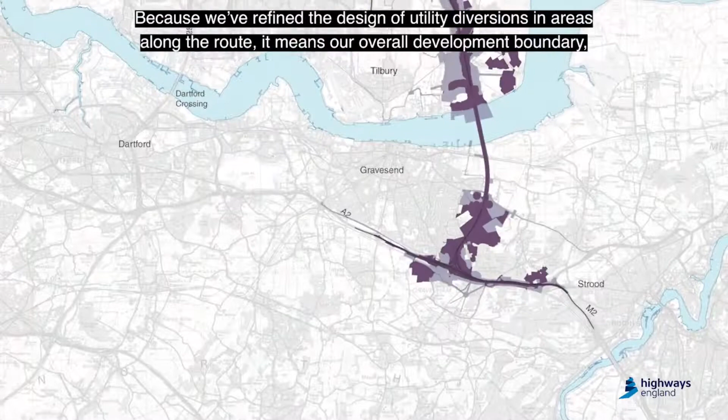Because we've refined the design of utility diversions in areas along the route, it means our overall development boundary, which is the land we need to construct the scheme, has reduced in size. This means that the number of properties inside the development boundary has nearly halved. You can see more details on this in our consultation documents online and in our virtual exhibition. If your property is in or near the development boundary, we will have written to you directly, but if you've got any questions, please do get in touch.

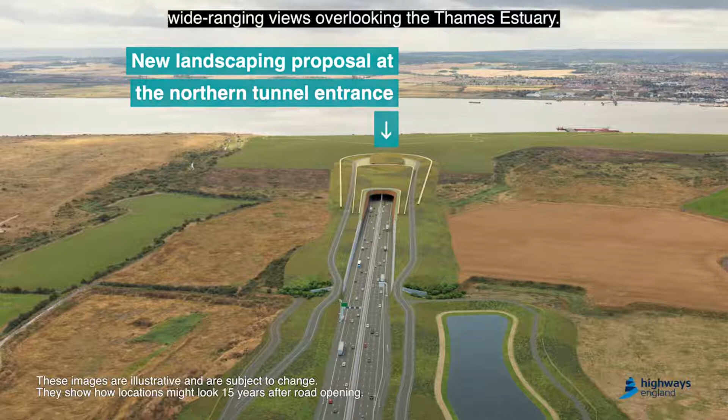Around the northern tunnel entrance near Tilbury, we're proposing to install utilities that would provide a power supply to the tunnel boring machine and northern tunnel entrance during and following construction. A new water supply for the tunnel boring machine and construction site area would also be required. This supply would come from the Linford borehole and a local water main. We're also proposing earthworks which would create a new landform design around the tunnel entrance and provide wide-ranging views overlooking the Thames estuary.

Following feedback from landowners and stakeholders, the maintenance access tracks around the northern tunnel entrance would be moved closer to the Lower Thames Crossing. This is to allow for a shorter culvert length, which would minimise the impact on the local ecology and allow wildlife to navigate through the culvert more easily. Two footpaths in the area would also be slightly realigned, and a new shared path along the south of Muckingford Road would also be progressed. This would allow for better connectivity between Chadwell St Mary and East Tilbury.

Near the A13 junction in Orsett, we're now proposing a new area of land for the relocation of the Travellers site. This would be adjacent to its current location with access off Gammonfields Way. As part of our woodland planting proposals, we've identified 2 separate areas off Baker Street that we would look to make accessible to the public.

Due to the essential realignment of a watercourse, we're proposing to remove a false cutting that we previously proposed in a section of the route between the A128 Brentwood Road and Hoford Road. So we're now developing other ways to help conceal the Lower Thames Crossing. Further details on this can be found in our consultation maps and documents online.

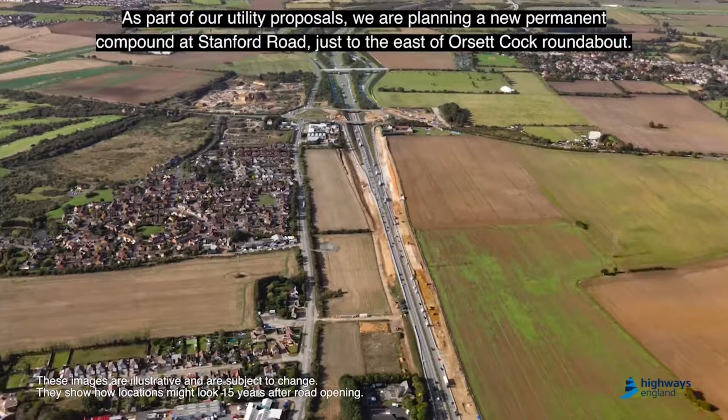As part of our utility proposals, we're planning a new permanent compound at Stanford Road, just to the east of Orsett Cock roundabout. This would be required for the operation and maintenance of a proposed gas pipeline, which would supply the local community. In the vicinity of the Mardyke, we're proposing permanent access from Green Lane for the National Grid. This is so it could maintain overhead electricity transmission cables during the diversion works and afterwards for the operation of the network.

North of Thames Chase Forest Centre, we're proposing a new maintenance access track and a multi-utilities diversion. We've located these within the same area to limit the reduction in woodland compensation that would be required to accommodate these changes. Around junction 29 of the M25 within the vicinity of the B186 North Road, some above and below ground multi-utilities would need to be diverted to facilitate the proposed route. Full details about these utilities proposals can be found in consultation maps and documents online.

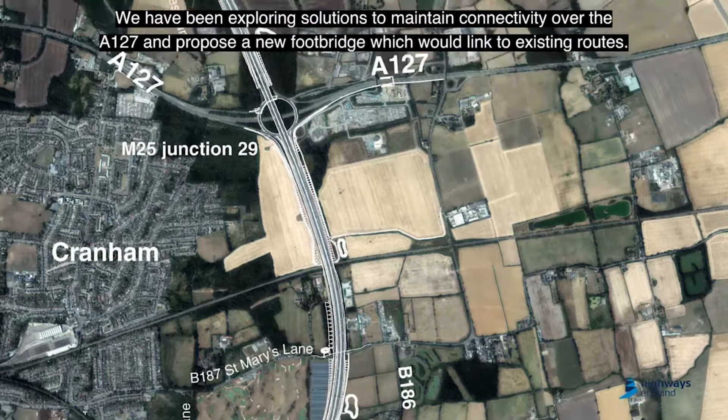We've been exploring solutions to maintain connectivity over the A127 and propose a new footbridge which would link the existing routes. We've carried out detailed noise assessments and have identified locations along the route where noise barriers could be used to reduce the sound of traffic for local communities. Further details on these proposed locations of noise barriers can be found in our consultation documents and maps online and in our virtual exhibition.

These are just some of the design refinements we're consulting on.

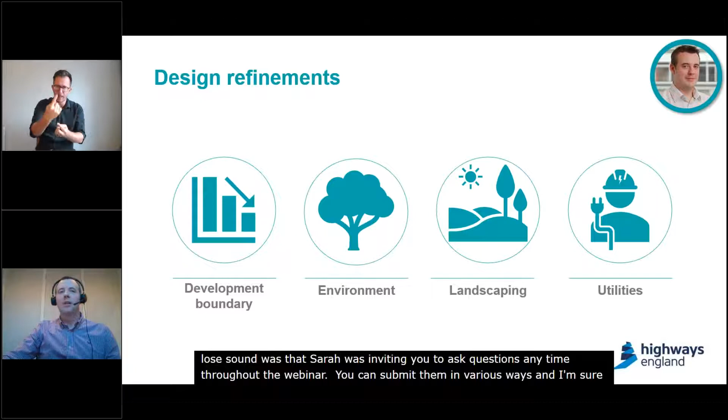Okay, so to complement the video you just watched, we'll now run through the refinements in a little more depth. We'll start off by covering some key themes regarding the development boundary, the environmental impacts, landscaping and utilities. And then we'll dive into the refinements on a junction by junction basis. So we'll start by discussing the development boundary.

Okay, so we have the development boundary map on the screen right now, and we've been able to reduce the amount of land required by around 12.5%, and this is by refining the design of the utility diversions in some areas along the route. Within this revised development boundary, there is now some additional land that will be required permanently, whereas other areas like construction sites will only be needed temporarily. Any land that's required temporarily will be reinstated and returned to its owner once construction is complete.

If your property is affected by the scheme, you should have been written to already. And if you've received a letter, please feel free to give us a call to discuss it on 0300 123 5000. That's 0300 123 5000.

Okay, on to environmental impacts now. So following feedback from our supplementary consultation, we've been able to refine the land required for utility diversions, as I mentioned. In doing so, we've been able to reduce the impacts to various wooded areas.

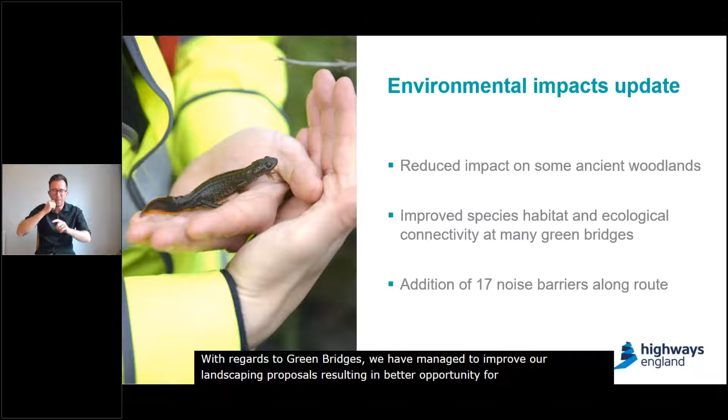With regards to green bridges, we've managed to improve our landscaping proposals, resulting in better opportunity for ecological connectivity. This means that we have now consolidated the green space on the bridges, which feature vegetation, like shrubs, trees, grassland, hedgerows, etc. And this makes it more attractive for wildlife to use as a crossing point over the given road.

To help mitigate noise, we've introduced some noise barriers in areas where higher noise levels and disturbance is anticipated. These barriers vary in length and height along the route. To learn more about specific noise barriers, please refer to the Design Refinement Consultation Guidebook, which is available on the Lower Thames Crossing website.

And now on to landscaping. As we've progressed the design of Lower Thames Crossing, we've also developed more detailed landscaping proposals to mitigate the visual impacts of the project's above ground infrastructure. Since supplementary consultation, we've added more detail on the specific type of ecological mitigation proposed across the route, such as grassland, woodlands, and further refinements around watercourses. And we've also updated various areas of the landform and provided some new viewpoints.

Turning now to our utility proposals, we've continued to refine our proposals for the utility diversions across the route, and we're now proposing some further changes to the position presented at supplementary consultation. One of the more notable updates includes the need for various small substations along the route. These would be approximately 3 meters by 3 meters and around 2.5 meters in height. The number and location of these substations will be confirmed following further design work and continued engagement with our stakeholders.

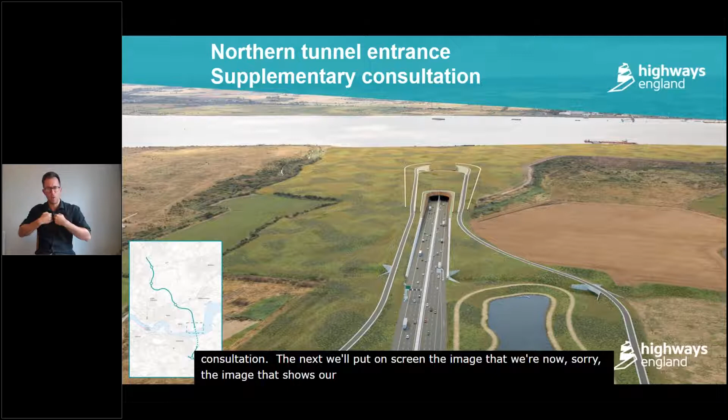Okay, so now we'll dive into the refinements north of the Thames, beginning with the Tilbury area and the area around the Northern Tunnel entrance. So the image on screen right now is the Northern Tunnel entrance near Tilbury as presented at supplementary consultation. And next we'll put on screen the image that shows our proposals at this design refinement consultation so that you can see the difference. We're just going to switch between the two.

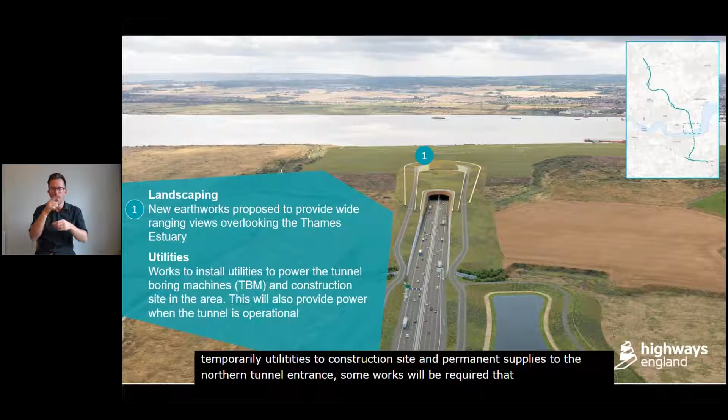With regards to utility proposals in this area, to supply temporary utilities to the construction site and permanent supplies to the Northern Tunnel entrance, some works will be required that sit approximately 1.5 kilometres outside of the development boundary that was presented at supplementary consultation.

Staying in the same area, we're now showing another angle of the Northern Tunnel entrance as presented at supplementary consultation. And again, we'll switch between this image and the one showing our proposals for the design refinement consultation so you can see the difference. Thank you. Next slide, please.

Moving now to noise barriers. These are shown as points 1A through to 1C on the image. The Tilbury area will feature 4 noise barriers as part of our noise mitigation efforts. If you'd like to learn specifics about these barriers, please see the Guide to Design Refinement Consultation, which is on our exhibition website.

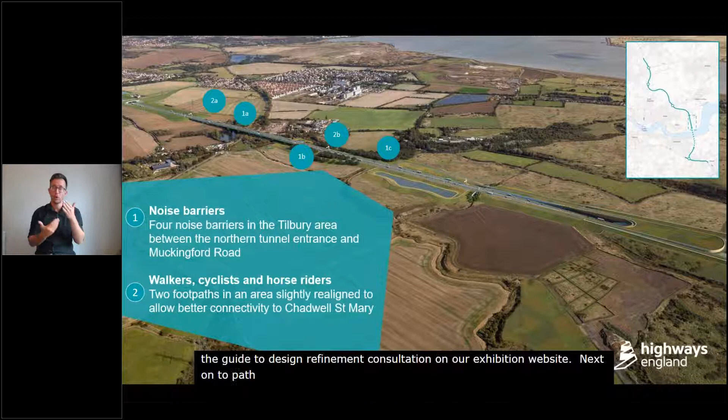Next, on to paths for walkers, cyclists and horse riders. These are shown as numbers 2A and 2B on the image. The path closest to us is footpath 200, and the path furthest east, closest to East Tilbury, is footpath 61. Footpath 61 has been slightly amended to use more of the existing footpath and to follow the existing field boundary. This refinement reduces the amount of land that will be required permanently in this area.

Footpath 200 will be diverted around the edge of the field rather than pass through it, as was proposed at supplementary consultation, and this will connect with the existing footpath at either end. This proposal is closer to the original alignment.

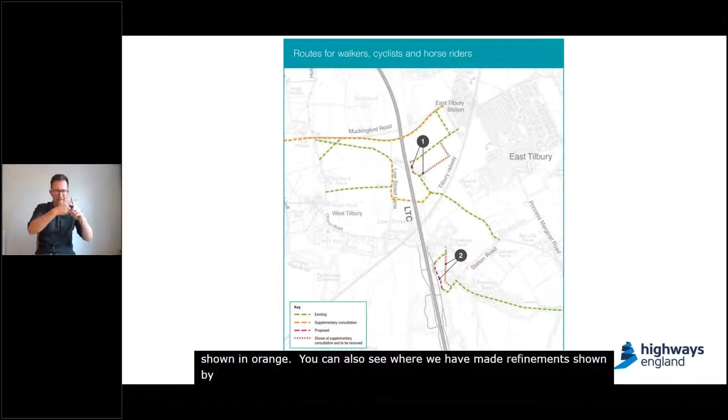So taking a closer look at the paths in this area, we've marked the refinements to footpaths 61 and 200 in red on the map on screen now. Existing paths are shown in green, and what was previously presented at supplementary consultation is shown in orange. You can also see where we've made refinements shown by the dotted X's. These refinements reduce the amount of land that will be required permanently in this area.

Moving on to utilities in the Tilbury area, as the tunnel boring machine would need a water supply to assist with the excavation process, we're proposing two routes to gain access to water using the Linford borehole as well as a local water main located near Fort Road and Gun Hill. Details of where we propose to route the water mains can be found in the Guide to Design Refinement consultation.

In addition to the works described previously, we're also planning on the addition of two substations in the areas surrounding the northern tunnel entrance, and these again are described in more detail in the guide.

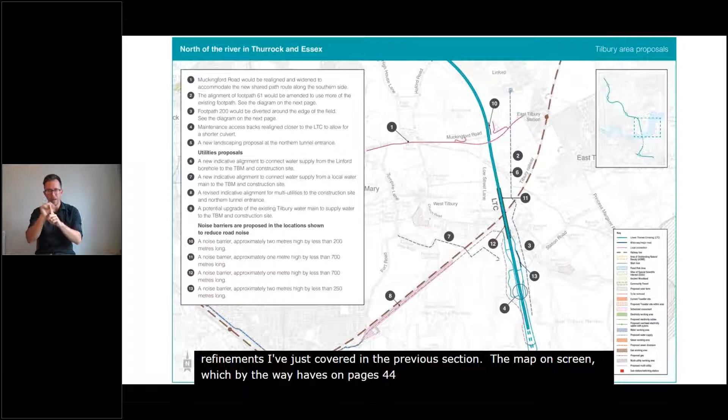So just to recap on the refinements I've just covered in the previous section, the map on screen, which by the way is also on pages 44 to 45 of the Design Refinement Consultation Guide. Starting with number 5 on the map, you can see where we propose the lookout over the River Thames estuary that we discussed earlier.

Moving on to utility diversions, points 6 through to 9 show some of the utility diversions we're proposing. Point 6 in particular shows the new alignment to connect the water supply from Linford borehole to the construction site and the tunnel boring machine. Finally, points 10 through to 13 show the proposed locations of noise barriers in this area.

Okay, so now we'll dive into the refinements around the Orsett Cock roundabout near the A13 junction.

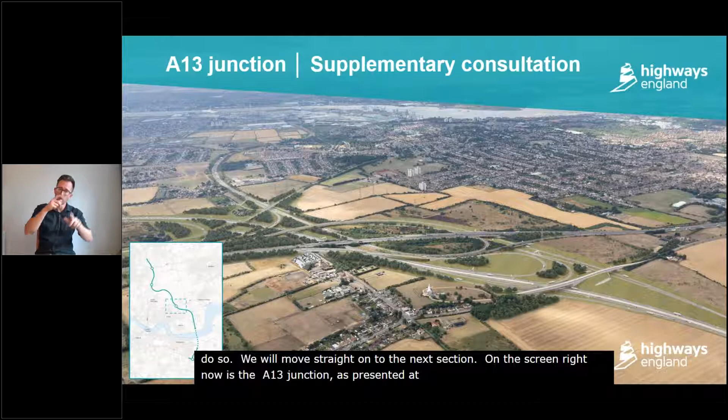So on the screen right now is the A13 junction as presented at supplementary consultation, and we'll switch between this image and the one showing our proposals for this design refinement consultation so you can see the difference. Thank you. So now going into the detail.

Firstly, with regards to the traveller's site in this area, following further design work and feedback from our supplementary consultation, we're now proposing a new site adjacent to its current location with access off Gammonfields Way. The traveller's site would remain approximately 1.5 hectares in area, which is the same as it is now, with an additional 1.5 hectares set aside for appropriate access and landscaping. This is shown as number 1 on the image on screen.

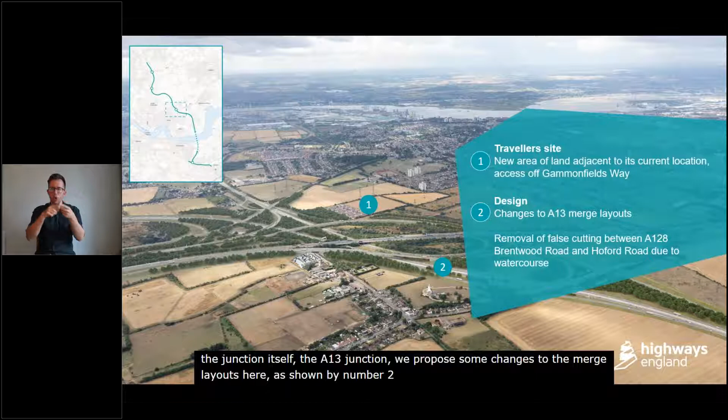Moving to design refinements at the junction itself, the A13 junction, we propose some changes to the merge layouts here, as shown by number 2 on the image on screen. So where the A13 westbound and the A1089 northbound slip join the LTC northbound, our modelling has shown that more heavy goods vehicles would join Lower Thames Crossing northbound from the A1089, so a different merge layout will be required. Also, where the slip road from the Orsett Cock roundabout joins the existing A13 westbound, there's a slight increase in forecast traffic flows, meaning a different merge layout will be needed there as well.

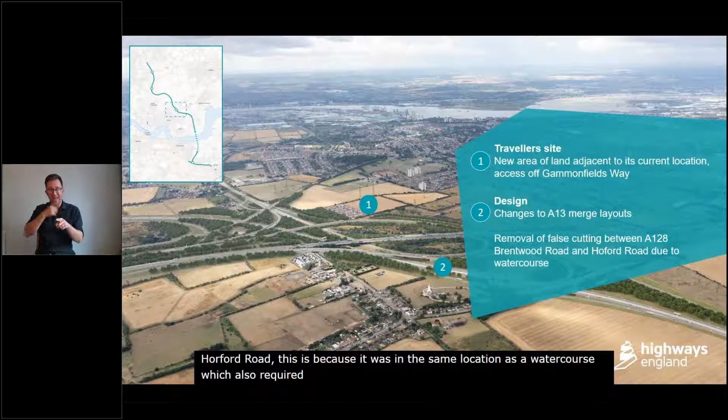Next, we've also proposed the removal of a false cutting, or a sloped embankment, some may call it, between the A128 Brentwood Road and Hoford Road. And this is because it was in the same location as a watercourse, which also required realigning to avoid Lower Thames Crossing. So removing this sloped embankment will mean losing some visual and noise screening, so fencing and additional planting are proposed to help conceal Lower Thames Crossing.

Onto utilities, we currently propose 7 small substations in the vicinity of the A13 junction. These would be approximately 3 metres by 3 metres in size, with a total area of 5 metres by 4 metres. If you'd like to know the specific locations of these substations, you can find more details in the Guide to Design Refinement consultation.

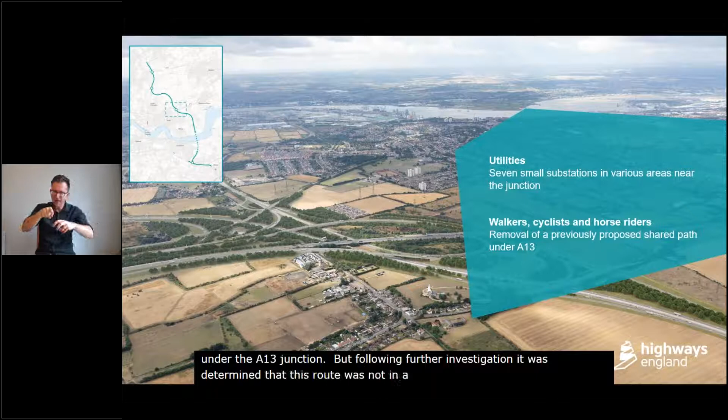For walkers, cyclists and horse riders, at supplementary consultation, we were exploring the feasibility of a new footpath connection under the A13 junction. But following further investigation, it was determined that this route was not in a desirable location due to its close proximity to the high-speed traffic. As a result, the open space to the north of the A13 that was proposed in supplementary consultation is no longer included in our plans, as it would not be accessible.

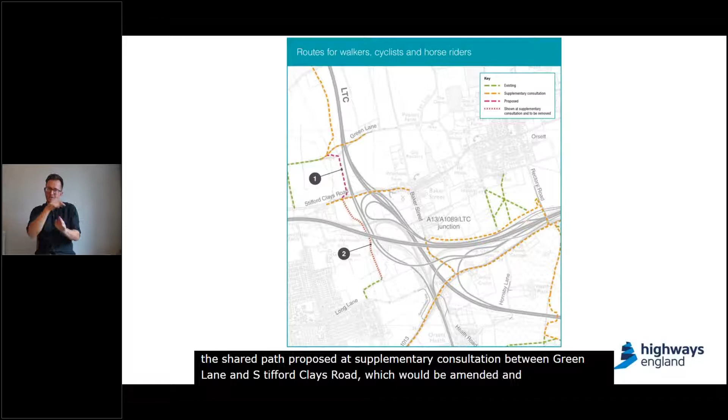Just taking a closer look at paths in this area, we've marked the newest proposed refinements in purple, with existing paths in green and what was shown at supplementary consultation in orange. You can also see where we've made refinements shown by the dotted X's. Number 1 on this plan shows the shared path proposed at supplementary consultation between Green Lane and Stifford Clays Road, which will be amended so it's slightly closer to Lower Thames Crossing to avoid impacting farmland. And number 2 shows what was discussed on the previous slide, where we're no longer progressing with a shared path under the A13 due to its close proximity to the A13 and slip roads.

So on the screen right now is the Orsett Cock junction near the A13 as we presented it at supplementary consultation. And again, we're going to switch between images, bringing you up to date with our design refinement consultation proposals so you can see the difference.

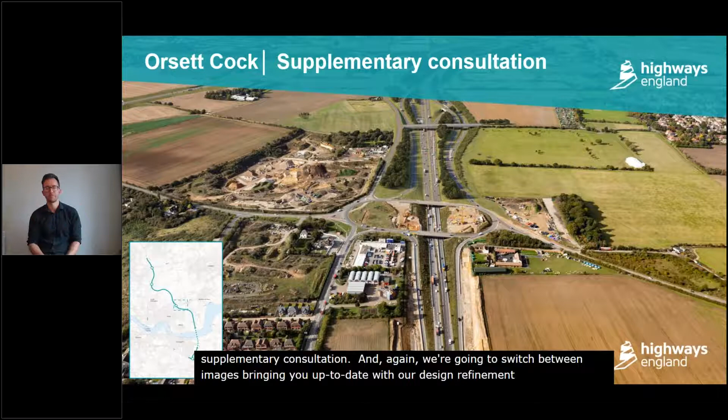So going on to the detail in this area, beginning with noise barriers, these are denoted by 1A and 1B on this slide. There are 2 noise barriers proposed west of Orsett Cock Junction.

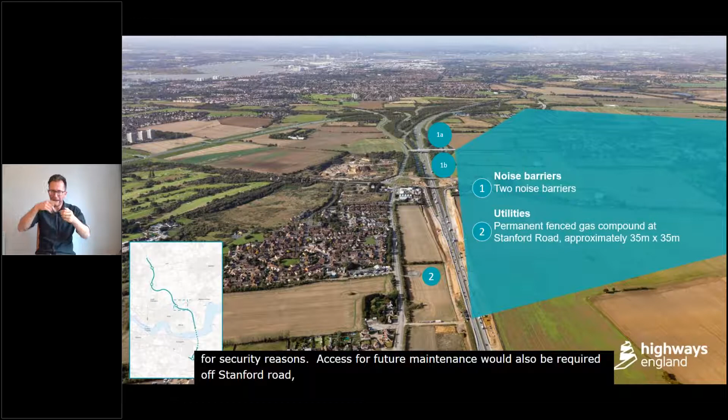With regards to utilities, as denoted by number 2 on the image on screen, a permanent compound east of Orsett Cock roundabout along Stanford Road is planned for the operation and maintenance of a proposed gas pipeline in this area. The facility, including equipment, will be located within an area approximately 35 metres by 35 metres, which would include some fencing for security reasons. Access for future maintenance would also be required off Stanford Road. Some land outside the development boundary shown at supplementary consultation would also be required for these works. This means that the development boundary has been extended in this area.

So just to recap on that section, we've just covered the area which is actually also shown on pages 56 to 57 and 58 to 59 of the Guide to Design Refinement Consultation, for those of you who've got that. Starting with number 1, the map on screen, this is where we propose changes to the merge layouts owing to new and improved modelling data.

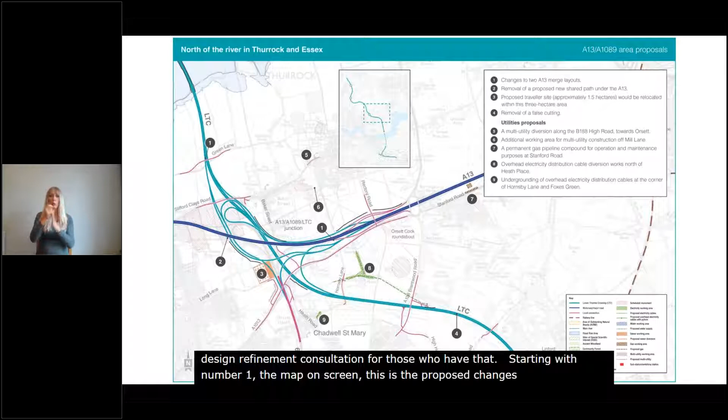Number 2 shows where we are no longer progressing with a shared path under the A13. Number 3 shows where we've proposed the relocation of the Travellers site adjacent to its current location. Number 4 shows where we propose the removal of the false cutting or sloped embankment.

Next, number 10 shows the location of wooded areas off Baker Street that we're proposing to make accessible to the public. And finally, numbers 11 through to 18 show the location of noise barriers. Okay, so now we'll cover the refinements in the Mardyke and M25 LTC junction areas.

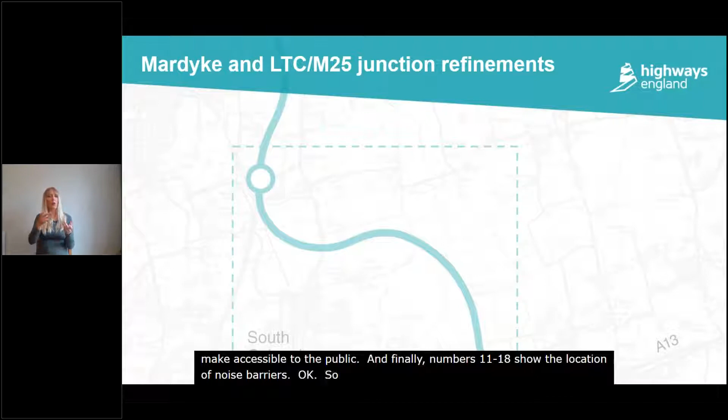For utilities in this area, National Grid need access to Green Lane for the maintenance of their overhead power lines, and this access will be required during the diversion works for the lines and afterwards for the operation of the network. These works would require the use of some land outside of the development boundary shown at supplementary consultation. By increasing the land for the works required at this location, we have more space and that means that we can avoid impacting existing vegetation.

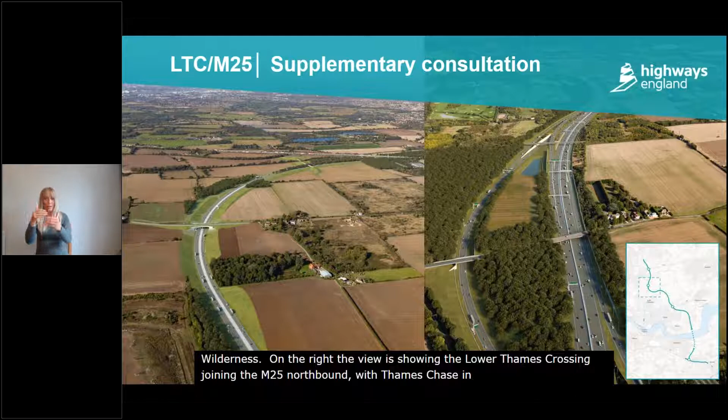On the screen right now is the LTC M25 junction as seen from 2 perspectives as presented at supplementary consultation. So starting with the image on the left, we're looking at the Lower Thames Crossing from the east of North Road Bridge and the area around the wilderness. On the right, the view is showing the Lower Thames Crossing joining the M25 northbound with Thames Chase in the foreground. So we'll just switch now between these images and the ones showing our proposals for the design refinement consultation so you can see the difference. Thank you. So now onto the detail in this area.

So firstly, we're proposing a noise barrier in the area of the wilderness. This is denoted by the number 1 on the image. Details of those noise barriers, again, are available in the guide, design refinement consultation, or on our exhibition website. With regards to planting, staying in this area, we're proposing to divert a watercourse within the area of the wilderness, and to accommodate this, we're proposing a reduction in the woodland planting in this area. This is shown as number 2 on the image.

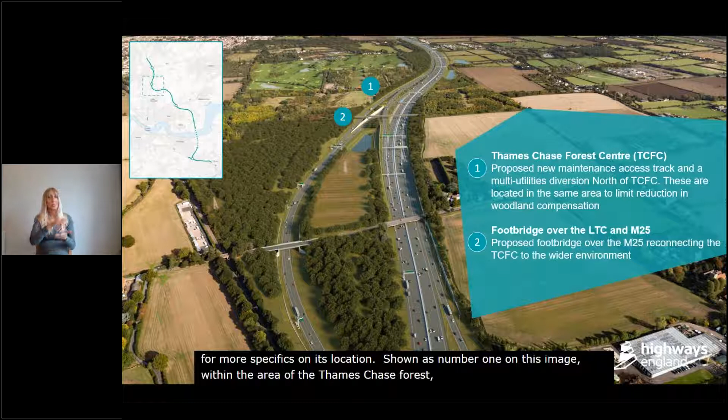And finally, utilities. We're currently proposing 1 small substation in this area. Again, please refer to the guide for more specifics on its location. So shown as number 1 on this image, within the area of the Thames Chase Forest, we're proposing a new maintenance access track which will be shared with multi-utility diversion corridor north of Thames Chase Forest Centre. These are located in the same area to minimise the reduction in woodland compensation.

And shown as number 2 on this image, we also propose to acquire replacement land to the north and south of Thames Chase Forest Centre. This would be landscaped to match the current site and would connect to existing paths. The replacement land would be designed to complement the existing forest. As part of the mitigation, we propose a footbridge over the Lower Thames Crossing and M25 to improve the connection between the western and eastern sections of the Thames Chase Community Forest.

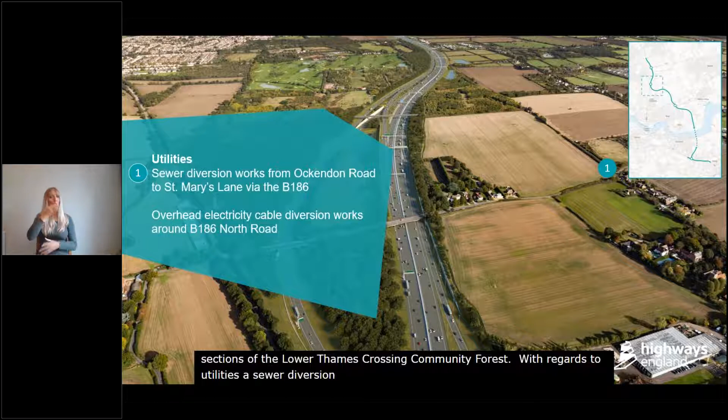With regards to utilities, a sewer diversion may be required from Ockendon Road to St Mary's Lane via the B186. This is due to the proximity of the existing sewer pipes to the proposed Lower Thames Crossing route and the proposed Ockendon Bridge construction works in this area. That's number 1 on the image on screen.

There's also some above and below ground utilities within the vicinity of the B186 North Road, which would need to be diverted to facilitate the proposed Lower Thames Crossing route. Some of the overhead power lines in this area may also need to be placed underground to avoid the proposed Lower Thames Crossing route.

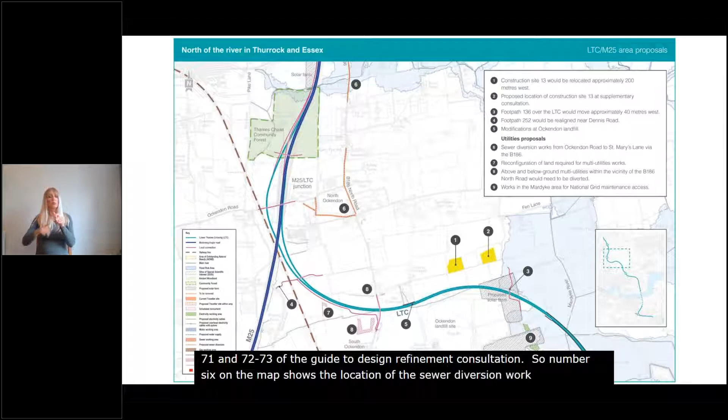So to recap on that last section we've just covered, the map on screen right now is also on pages 70 to 71 and 72 to 73 of the Guide to Design Refinement Consultation. So number 6 on the map shows the location of the sewer diversion works. Number 8 shows where utility works would take place in the vicinity of the B186 North Road.

Number 10 on the map points out Thames Chase Community Forest, where we're proposing to reduce the woodland planting to accommodate a new maintenance access track and for utilities. Number 11 shows where reduced woodland planting would take place at the Wilderness as a result of a watercourse diversion. And finally, points 12 through to 14 show the location of noise barriers from the Mardyke area to the Lower Thames Crossing M25 junction.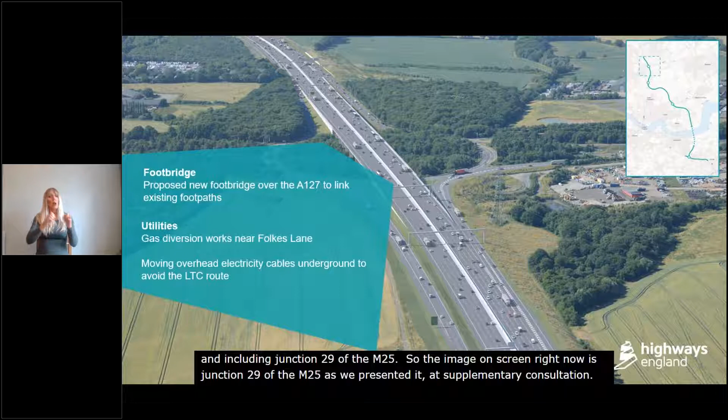Starting with a new footbridge, at supplementary consultation we showed an existing path next to the south side of the A127 that was impacted due to the addition of segregated left turn lanes on and off Lower Thames Crossing. These lanes meant that the existing crossing points to the south of the junction would no longer be feasible. So we now propose a footbridge over the A127 to link the existing routes. Unfortunately, the footbridge is just out of frame on this image, but I'll point it out on the map on the next slide.

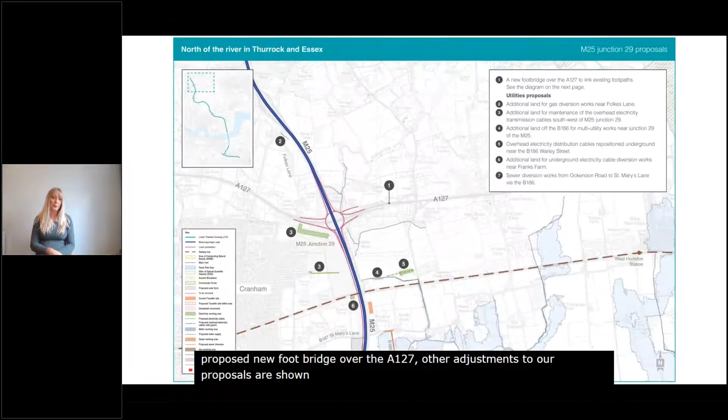So as just mentioned, shown as number 1 on the map on screen, this indicates the proposed new footbridge over the A127. Other adjustments to our proposals are shown in the purple colour. So just to recap on that section, which is also on pages 82 and 83 of the Guide to Design Refinement Consultation.

Starting with number 1, that shows the proposed location of the footbridge over the A127, which will link the existing facilities in this area. Moving on to number 2, this is where the Folkes Lane gas diversion would take place, for which we require additional land compared to that presented at supplementary consultation. And finally, I'm just going to point out number 5 on the map, which shows where we're proposing to bury some electricity distribution cables, which are near the B186 Warley Street.

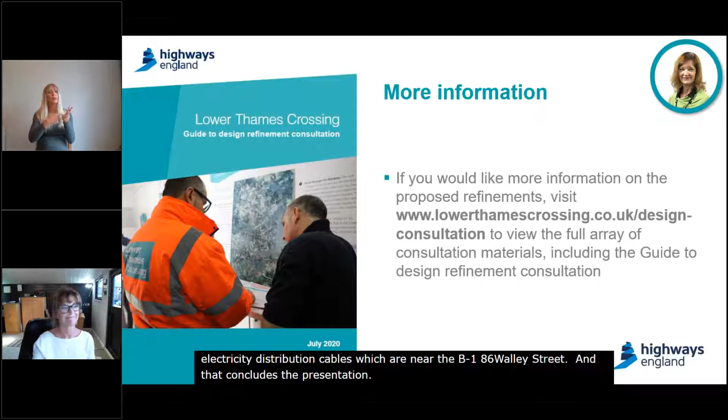And that concludes the presentation, and I'll hand back to Sarah. Thanks for that run through, Steve. Thank you for the run through of those proposed refinements along the route. I think that was really laid out really clearly.

As we mentioned at the start of our webinar, our goal today was to provide you with an overview of some of the more notable refinements made to our proposal since our supplementary consultation.

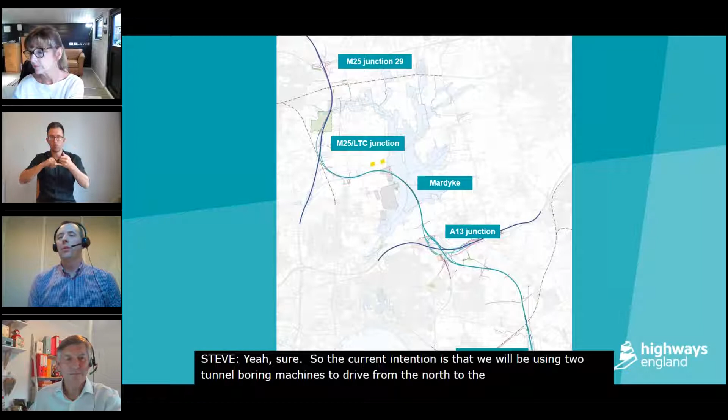Steve, I think this is a question for you. It's a question about on which side of the river will the tunnels be bored from? Steve, would you mind picking that up? Yep, sure. So the current intention is that we'll be using 2 tunnel boring machines to drive from the north to the south. It's possible that one will be used and then brought back to the north side, but the intention is to drive from north to south for both tunnels.

So there'll be a large compound around the northern tunnel entrance where the tunnelling activities and associated support functions will sit. There's quite a lot of information about this within the statutory and supplementary consultation guide. So if you wanted to know more about how the tunnel is going to be built, you can look there, which is on the Highways England website under Lower Thames Crossing. Thank you for that, Steve. I know that's a question that's come up before and one that intrigues people.

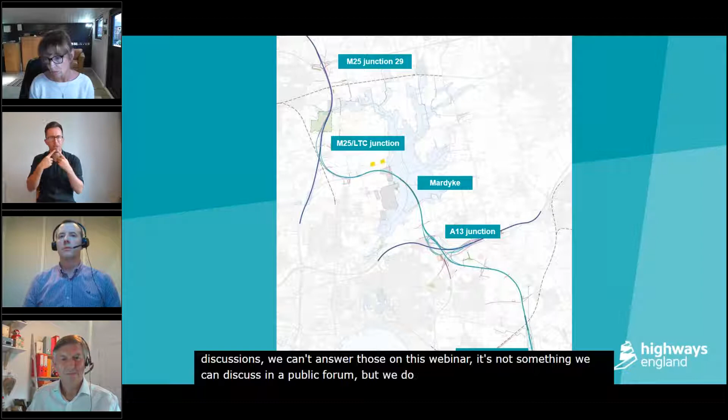We've had a few questions come in about individual land and property matters. As we said earlier, to protect the confidentiality of everybody who's involved in land and property discussions, we can't answer those on this webinar. It's not something we can discuss in a public forum, but we do have a dedicated land and property team. And I would encourage you to give them a call using our telephone surgery service. It's quite simple to place a call, and we will get one of our specialist team from the land and property team to call you back.

So you can either email on info@lowerthamescrossing.co.uk or give us a call on that number that we've mentioned a couple of times, 0300 123 5000. So that's just a reminder for anybody who's asked land and property questions. It won't be something that we're able to handle this evening.

Okay, another question's come in. This is about the A13 junction. Gary, this might be one for you. Will the junction with the A13 still make, and I'm so sorry, it's just disappeared off my screen. I will get back to it. Will the junction with the A13 still make the 3 lanes back to 2? Can this not be improved, seeing as we've been through all the grief making the 2 lanes up to 3 at great cost? That's a question there about the A13. Gary, can you pick that up?

Yes, of course. Good evening, everybody. With the A13, the section that's been widened is from Orsett Cock up to Manor Way, which is currently being done under the Thurrock scheme. So that's being widened out from 2 lanes to 3 lanes, and it's mainly to feed the London Gateway port down through the A13. A section of the A13 junction we will be making is from 3 lanes back down to 2, but it's within the junction. It's normal practice to do that.

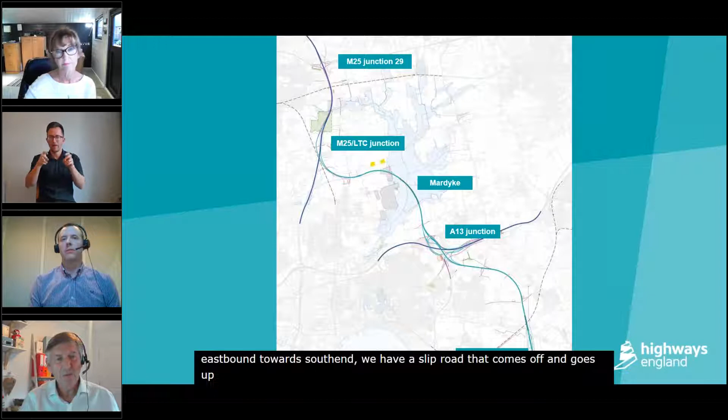The sections that we're going to be doing are in between the A1089 and the Orsett Cock roundabout. If you're coming out of London, so going eastbound towards Southend, we have a slip road that comes off that goes up to Orsett Cock roundabout. So what we get is what we call a lane drop. And from that point onwards, there's a section where the Lower Thames Crossing north and southbound link road will join onto the A13. And we have to have a lane gain. The merge type has to be a lane gain, otherwise it's a departure.

So in fact, we'd have to go to 4 lanes beyond that if we weren't. But the traffic on that section, it's about 400 meters long, that's all, would be reduced to two lanes, and vice versa. Going back into London again, where we've got the slip road going off to LTC, so a lot of traffic coming off the A13, and the traffic from Orsett Cock rejoining the A13, there's about a 600-metre length that would go down to the 2 lanes. But again, if you look at any highway junction, you often get a lane drop and a lane gain.

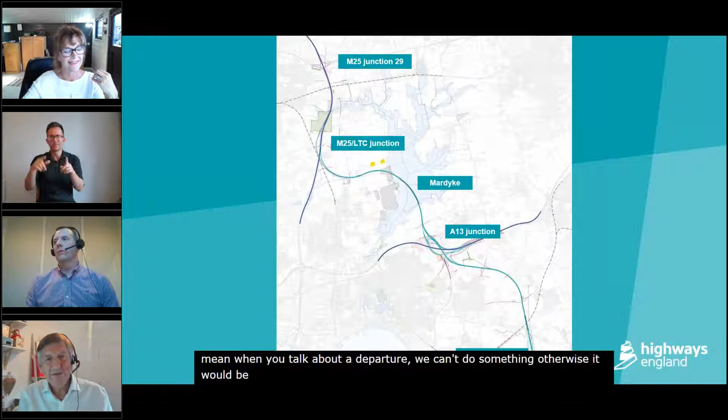Gary, before you finish that question, can you just briefly explain what you mean when you talk about a departure? We can't do something, otherwise it would be a departure. What does that mean? Right, so a departure from the standard isn't necessarily a bad thing, actually. It's really just pushing the standards. What it means is that if you don't comply with the standards precisely, you have to then go and speak to the safety division with Highways England and get agreement with them to go ahead with that particular design.

But also, even if it's an over-provision, you have to go for departure. So sometimes we look at things and say, right, well, we need to do something a bit more here. But again, because it's the public purse and everything else, you have to actually make sure that it complies, and you have to do a risk assessment. So it's quite a long process to make sure that you don't do something that's not within the overall premise of the standard.

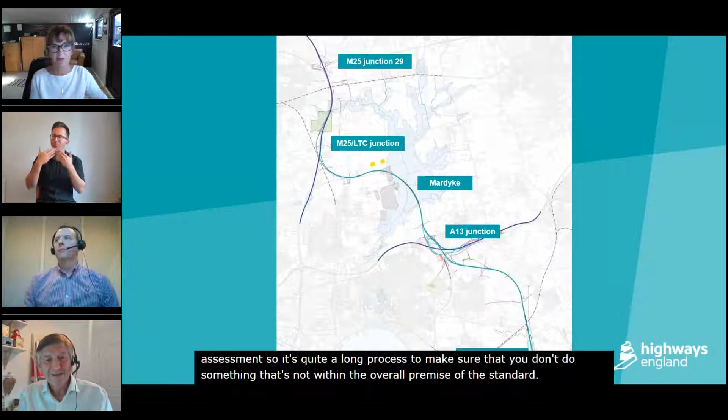Thank you, Gary. I think it's just useful to explain. Sometimes we all use language that we just expect everybody to understand. Yeah, thank you.

Next question that's come in. The removal of a false cutting between Brentwood Road and Hoford Road has raised alarms in the Linford community, who are already very concerned about the level of noise, vibration and air quality. Steve, perhaps you can pick this up. What mitigation is in place in construction and final road design?

Okay, yes. So just a quick reminder why we're taking the false cutting, the false embankment, away. Unfortunately it was coincident with the location of a watercourse diversion. So we have an existing watercourse that we need to divert because it clashes with our proposed alignment at Lower Thames Crossing, and we couldn't have that false cutting embankment in the same location as the diverted watercourse. So I'm afraid the watercourse won out in that regard.

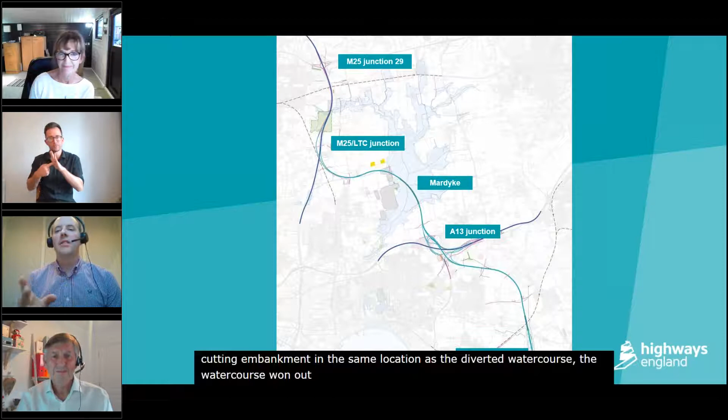But the false cutting in that area was really to be used as a visual screen to screen Lower Thames Crossing from the golf course side, looking southwest. And so we're planning to mitigate the loss of that visual screen from the embankment by putting some planting there instead. So it wasn't solely there for noise mitigation purposes. There is a property that's very close to Brentwood Road, and that will benefit from a specific noise barrier.

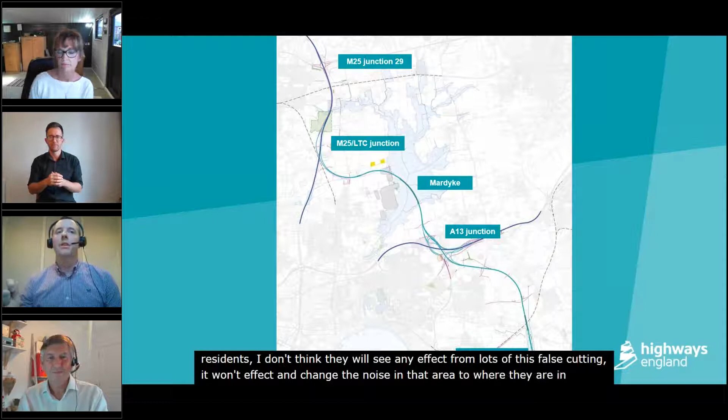In terms of Linford community residents, I don't think they'll see any effect from the loss of this false cutting. It won't affect and change the noise in that area to where they are in the east. In terms of construction effects, this change will not change the construction impacts.

What we're trying to do with those will be set out in detail in a document called the Code of Construction Practice, which has to be submitted as part of our development consent order, and that will set out very detailed measures and requirements that the contractor must meet in order to minimize noise, vibration and air quality issues. So I hope that will be available soon for public viewing, and I hope that will reassure the Linford community that we're doing as much as we possibly can to mitigate those effects. Thanks very much, Steve. Yes, that'll be available when we submit the development consent order application.

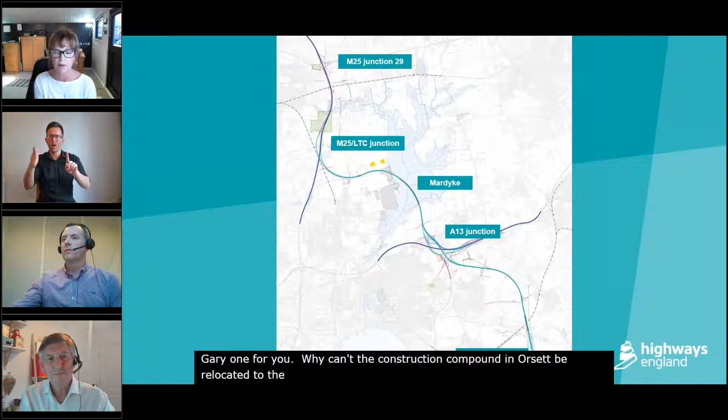Thank you. Another question now. Gary, one for you. Why can't the construction compound in Orsett be relocated to the west side of the LTC, moving it away from the Baker Street residential area? A couple of people actually asked that question.

Right, the construction of the A13 junction is very complicated. And I think we've got a number of construction compounds that will be needed to build LTC. The position is based on our construction requirements and providing access for our workers and material deliveries. The site near Baker Street is a small secondary site, which will typically include welfare facilities, materials and equipment. The location also provides access for the eastern side of LTC at that point.

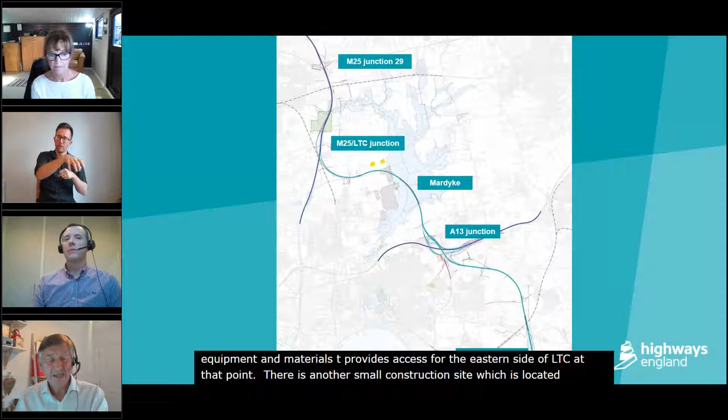There is another small construction site which is located on the west side of LTC to provide access from that side. And I just think the team looking at the actual construction strategy have found it's really the only location where we could sensibly fit in a compound. We have looked at the way the junction is being constructed, and that's been a site that's been allocated for that particular construction compound.

Thanks very much, Gary. On a completely different subject now, the next question that's come in. The question is, can you confirm that motorcycles will be toll-free in line with your statement that charging will be the same as the Dartford crossing? Steve, the question about charging then, with particular reference to motorcycles, can you pick that up?

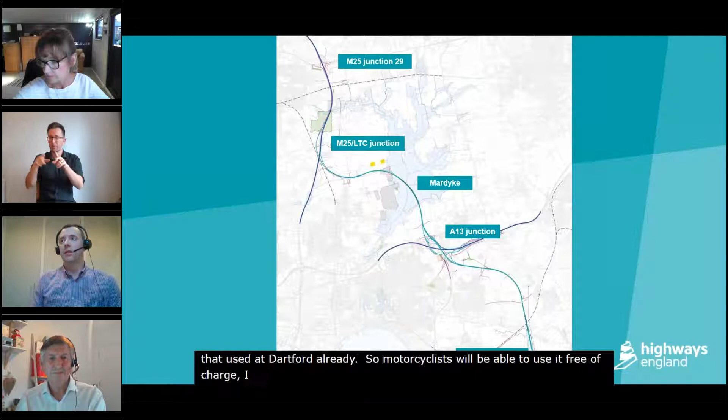Yep, sure. Yes, the charging regime for Lower Thames Crossing will replicate that used at Dartford already. So motorcyclists will be able to use it free of charge, I believe, as they do at Dartford. So it's a like-for-like scheme.

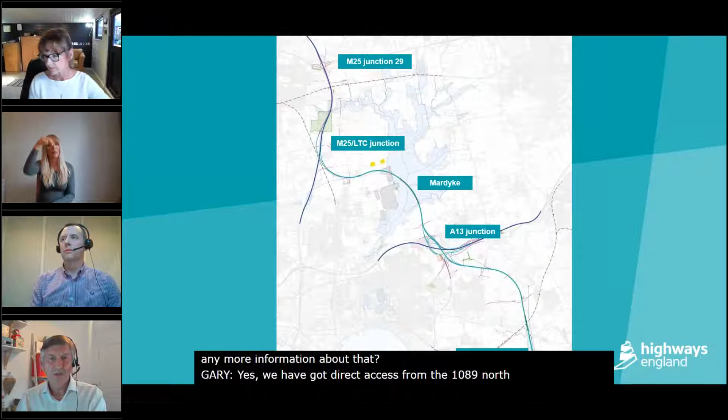Yeah, of course. We have got direct access from the 1089 northbound out of Tilbury, both northbound and southbound, onto the Lower Thames Crossing. The DP World traffic will be able to access LTC, but they will go along the new section that's been widened from Manor Way to Orsett Cock and go underneath Orsett Cock roundabout, going westbound into London, and join LTC either northbound or southbound, and vice versa. Could come off LTC and join the A13 going back towards the port. So yes, we have got connectivity between the ports.

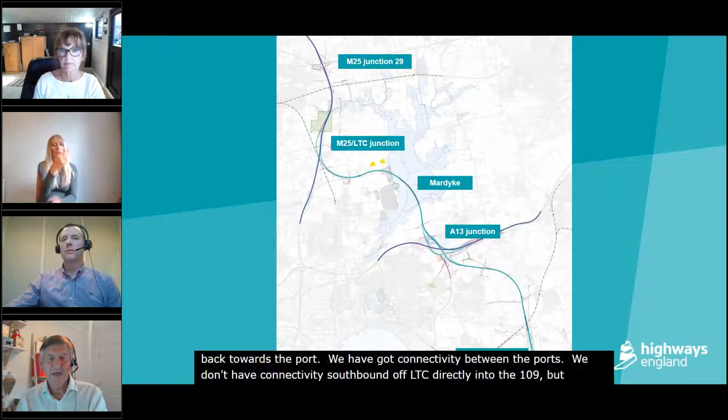We don't have connectivity southbound off LTC directly into the 1089, but that traffic would come down the M25 to junction 30 using the A13 and use the existing connection to the 1089, and that section of the A13 between LTC and junction 30 will have less traffic on it because LTC has removed that traffic. We don't believe there is an awful lot of traffic coming from the south to go to Tilbury, but that traffic would normally just use the existing Dartford crossing.

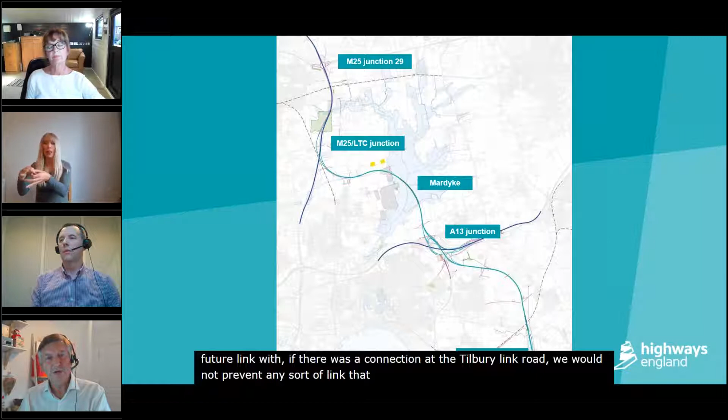So LTC will be designed so as not to prevent any future link. If there was a connection at the Tilbury link road, we would not prevent any sort of link that could be added at a later date if there was one to go in. And Highways England have marked it in their pipeline for Road Investment Strategy 3, and that's between 2025 and 2030. So there is something in the pipeline looking at doing possibly a future connection at a later date.

So Highways England are giving serious consideration to a new link road. However, it will need to be developed out of its own business case, so it doesn't form part of Lower Thames Crossing. It will be something that is being looked at, as I say, in the road investment strategy. Thank you, Gary. Thank you for that long answer.

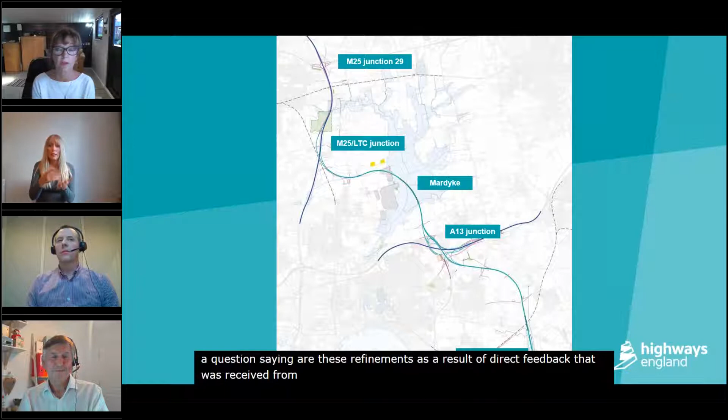Thank you. Another question now. The refinements that we're talking about in this consultation, are these refinements a direct response to feedback received from the supplementary consultation that was held earlier on in the year? Steve, how can you respond to that? Yeah, very much so. It is a mixture, but yes, some of these refinements, as we've called them, are very much from feedback from supplementary consultation.

For example, the new footbridge that we're proposing over the A127 up at junction 29 of the M25 was something that we looked at again in direct response to feedback at supplementary consultation. So that's quite a good example. There are other things linked to non-motorised users, walkers, cyclists, equestrians, and the links that have been put in for those. So they're quite small refinements, hence the name.

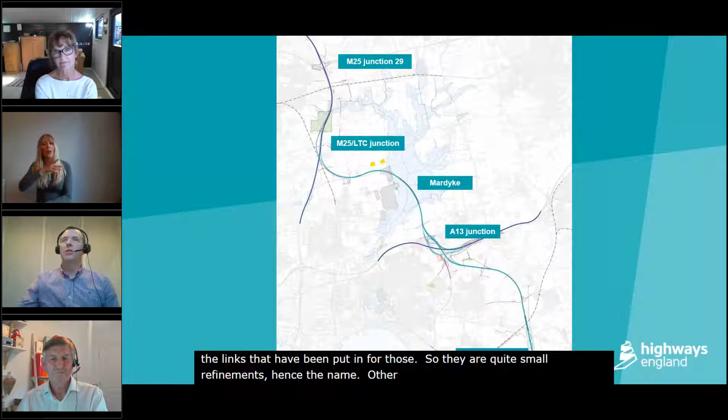Other changes have been made because we've had new technical information or new design data that's become available, and there is a continual dialogue with stakeholders. So a lot of the refinements that you see in this consultation are through the dialogue that we've had with the utility stakeholders in particular, and that has allowed us, for example, to reduce the amount of land that we're now looking to request. So yeah, the supplementary consultation was very positive, we've built on that, and some of the feedback from that consultation has made it into these refinements we're presenting now.

Thank you. That's why it's important that people do take the time to respond to these consultations. So anybody who's thinking about responding, please do so.

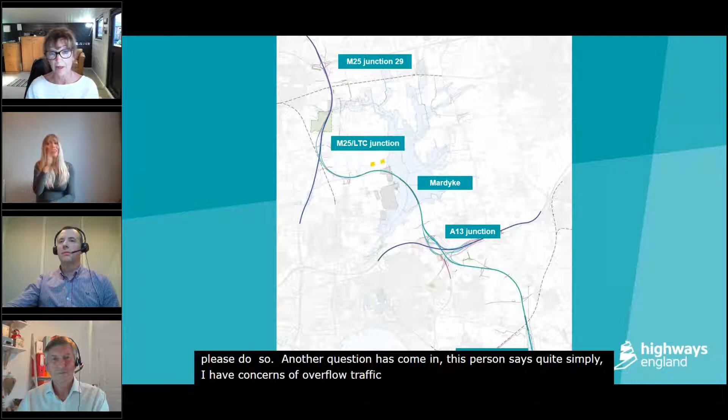Another question has come in. This person says, quite simply, I have concerns of overflow traffic through East Tilbury. Gary, how would you respond to the person who has those concerns?

Yeah, there's only really two ways to access LTC via Thurrock. It's via the A1089 going north, so coming out of Tilbury Docks and going north, or via the A13 going westbound towards London. So those are really the only connections onto LTC. So there's no connections at East Tilbury.

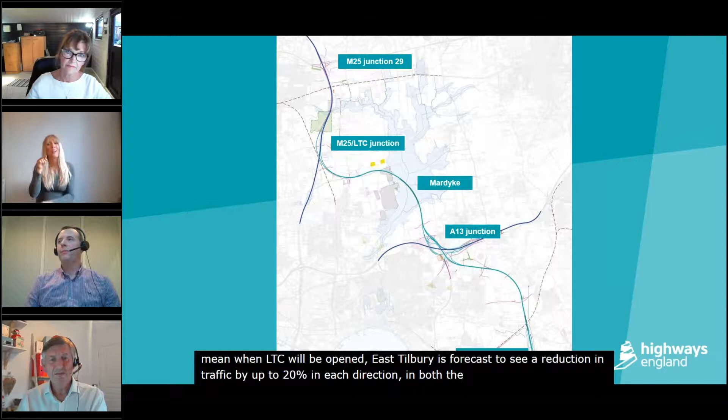So when LTC will be opened, East Tilbury is forecast to see a reduction in traffic by up to about 20% in each direction in both the AM and PM peaks. This can be seen, I think, in figures 4.10, 4.11 and 4.12 in the traffic modelling update that was presented at this supplementary consultation. So if you go onto the supplementary consultation website, there's a traffic modelling summary document that shows figures of what traffic flows are on each of those particular links. So it's figures 4.10, 4.11, and 4.12.

Thank you, thank you. And another question coming now, and again, it's around the kind of language that we use. Steve, a question for you. This person is asking, what is a gas pipeline compound and what will it look like? Specifically, they're talking about the one on Stanford Road in a fenced area. I think we've said it's 35 by 35. Can you explain what that is?

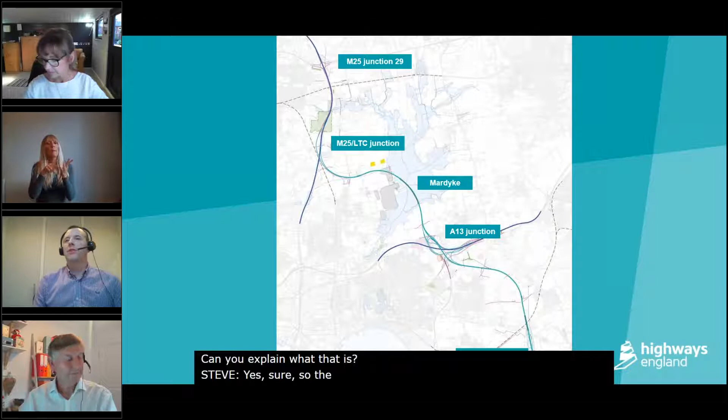Yes, sure. So the compound will house equipment which will be used for the operation and maintenance of an existing gas pipeline in that area. Our works are impacting on some of the equipment that's associated with that gas pipeline further west. So there needs to be access for safe operation and maintenance a bit further east. The location chosen is just off Stanford Road, as you say.

What will it look like? It's going to be a compound that's approximately 35 meters square, so 35 meters by 35 meters. There will be a perimeter fence to ensure security. And in fact, Gary and I were talking to the utilities engineer about this this morning, and there was a suggestion that the perimeter will be planted to help screen that facility.

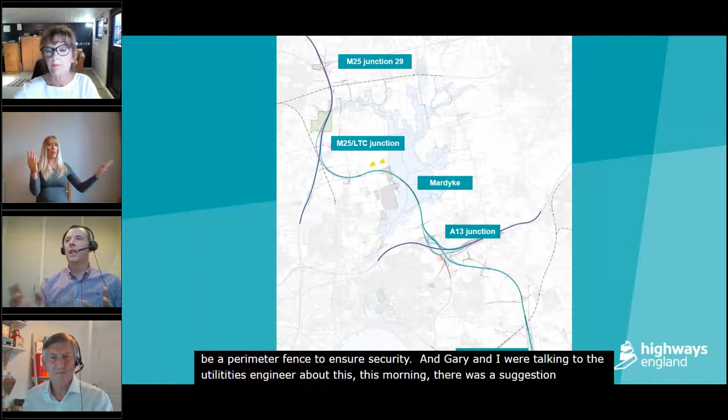So yeah, for any more specifics about what does it look like and what does it mean to me, if the person who's asked that question would like to phone our helpline, you can book a call with one of our utility experts and they can talk you through it in a bit more detail. The number, in case you don't know, is 0300 123 5000. So I suggest if you want to know more, just book a call back and one of the utilities team can speak to you about it. That's a good shout. Thank you, Steve.

Thank you. Another question to come in now. We've said that we're going to use a borehole, and I never really thought about this question before. It's a really good one. Why use a borehole when you've got a river next to the excavation? This person's saying surely pumps are cheaper than mains water and wouldn't tap the local water table. All right. Gary, shall I take that one?

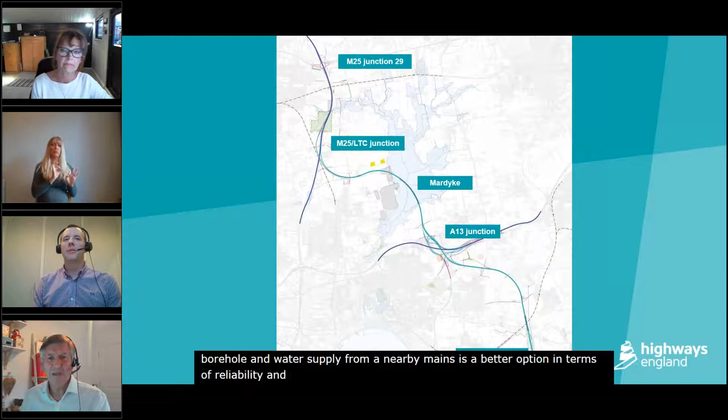Yeah, we've looked at options of extracting water from the Thames, and it was proposed that the option of the Linford borehole and water supply from nearby mains was a better option in terms of reliability and water quality. We do need clean water for the operations of a fire suppression system for the tunnel, so we will need to have clean water, and so upgrading the water.

Don't know if we might have lost Gary's sound there. Apologies if you've lost Gary's sound, as I know I have. Yes, I have too, Sarah. Unfortunately, we're not able to transcribe what Gary is saying. I think we'll move on to the next question. Apologies, Gary. Not even sure if you could hear me saying that. We'll move on. We'll try Steve.

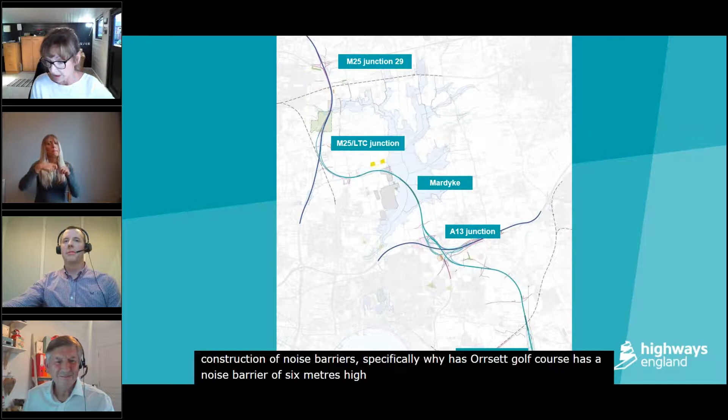Hopefully Steve's sound's working. Steve, we've had a couple of questions about noise barriers. Someone would like more detail on the construction of noise barriers. Specifically, why has Orsett Golf Course got a noise barrier of 6 meters high when there are no houses nearby, whereas Baker Street's only got a 1 meter high noise barrier in a residential area? And furthermore, why hasn't Whitecroft's care home got any noise barriers at all? These are really quite specific questions about specific areas. Steve, are you able to help?

Yes. Can you hear me okay? Absolutely. Yeah, I can. Fine. Good. I'm obviously not afflicted with the same issue as Gary.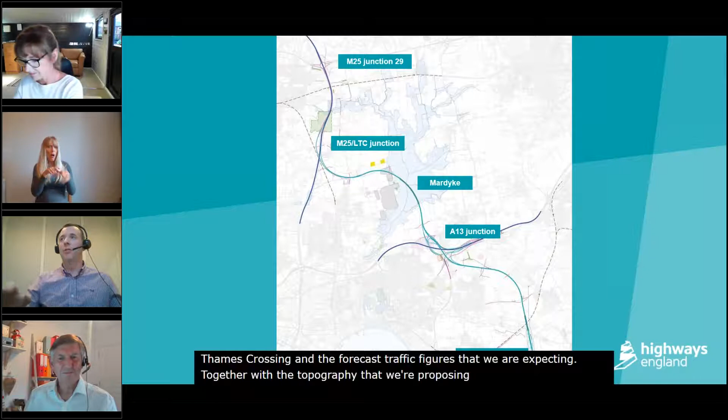Yeah, so the noise barriers: since supplementary consultation earlier this year, the environmental team and the acoustic specialists have been doing some detailed modelling based on the alignment of Lower Thames Crossing and the forecast traffic figures that we're expecting, together with the topography that we're proposing. That's the landform around Lower Thames Crossing.

They've put all that information into a model, and then they've tested the anticipated levels of noise at various receptors. So at various communities or properties along the route, they've tested to see what the predicted noise levels will be. And the result of that work has been the noise barriers that are presented in this design refinement consultation. So if there isn't a noise barrier where you'd expect to see one, it's because the noise modelling that we've done has shown that it's not anticipated to be required.

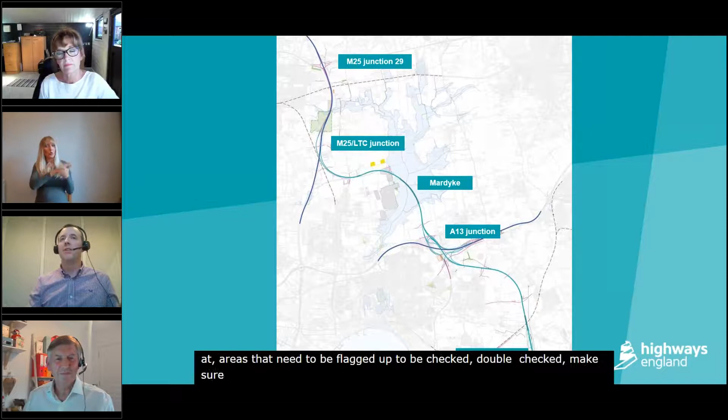However, this is a consultation and we very much welcome your feedback, and we will certainly look at areas that need to be flagged up to be checked, double checked, make sure that we've done the modelling correctly and not missed any areas.

Just specifically on the question with regards to the 6 metre high barrier at the golf course, that barrier is not to protect or mitigate noise to the golf course. It's for one specific property which is very close to Lower Thames Crossing, and so at the present time there is a barrier proposed around that property. So it's not for the golf course per se, it's for that particular property. But please do feed back your thoughts on those noise barrier locations.

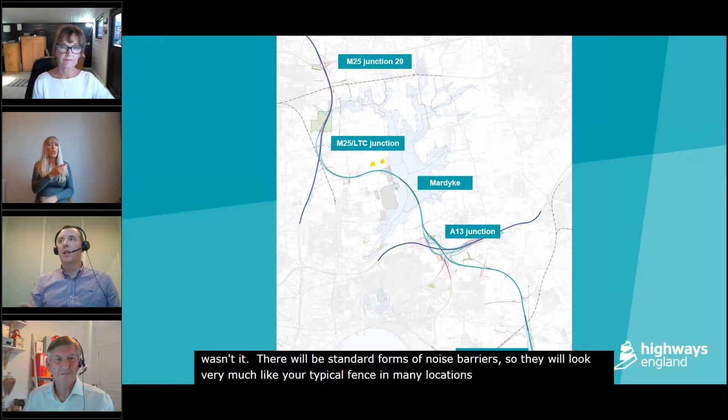Oh, in terms of construction, that was part of the question, wasn't it? They're going to be standard forms of noise barrier, so they will look very much like your typical fence in many locations. Some of those may also include some planting to help visually screen them. It depends on the location. Some noise barriers that are attached to structures like the viaduct, like Mardyke, will be part of the viaduct structure itself, so you won't actually notice it as a noise barrier as such. It'll be built into the structure.

I hope that answers all the points, Sarah? Quite a detailed question. Thank you, Steve. Yeah, you got through a lot there. Thank you. Right, I'm hoping that Gary's mic is working. We'll try Gary with another question. Gary, I hope you can hear me as well. Gary, a question for you. Is there any improvement in the vehicle movements and operating hours during construction? Can you hear me okay? Yes, you're back. Excellent.

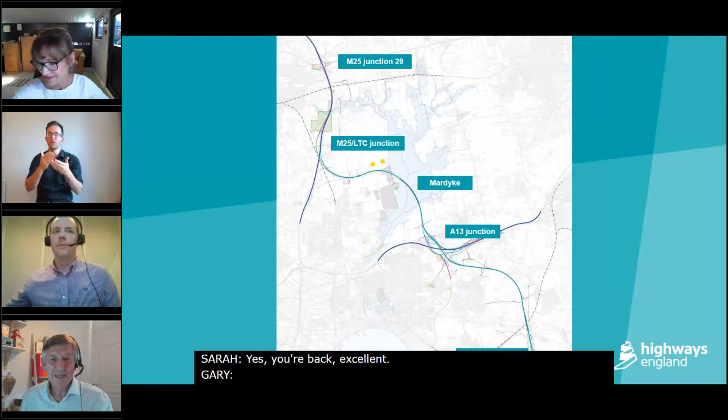Okay, thanks. Yeah, the movements of vehicles isn't covered actually by this consultation, but we continue to listen carefully to feedback from stakeholders regarding vehicle movements and operating hours during construction. We will agree the construction management plan before any construction work begins, and so that will form part of the DCO going forward.

Okay, thank you. I'm just going to check in quickly with the team to see if we've got some time for some more questions. There is one more question. There's a question here about which map shows where the emergency areas are along the LTC and how far apart are they? Gary, is there any information you can offer on that? Yeah, I'd most probably have to check. They're either in the GAs, the general arrangement plans, or they're in the engineering plans. So it's either map book 1 or map book 3.

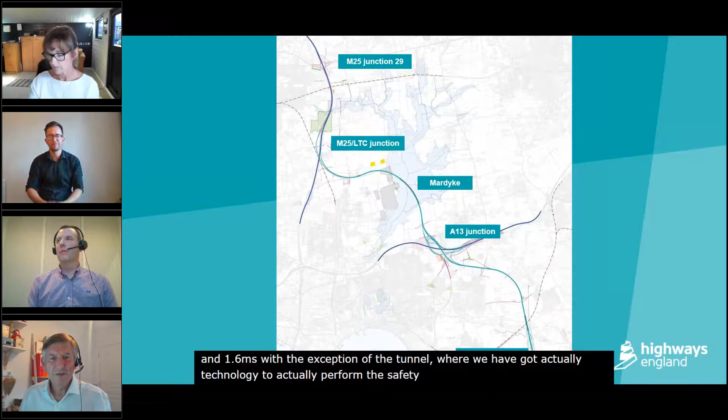And the spacing intervals are between 800 meters and 1.6, with the exception of the tunnel, where we've actually got technology to perform the safety aspects there. We've also assessed spacing in most of these areas at intervals of 1.2 kilometers. Emergency areas will be spaced at intervals of between 800 and 1.6, with the exception of the tunnel.

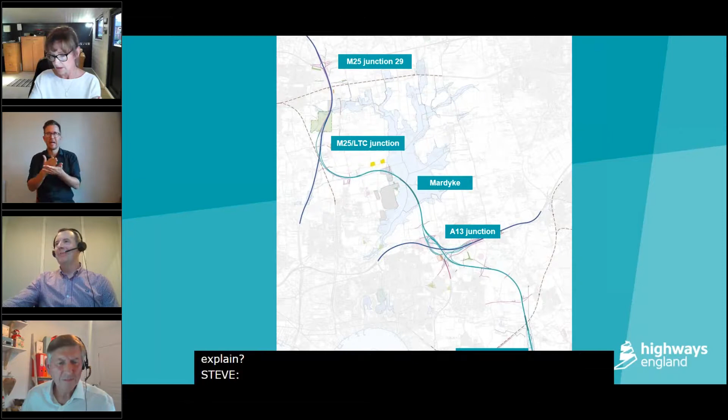Okay, thank you. So I'm told we've got time for a couple more questions. This is one I think for Steve. It says, on page 86, you say the development boundary has gone from over 26 kilometres to slightly below 23 kilometres in paragraph 2. And then in paragraph 3, we say, additional land along the LTC route would be required permanently. So this person is asking, how can both be true? Steve, can you explain? I'm not sure I can pick up the specifics on that one. I'd have to look into it. Yeah, if we go to another question, I can quickly read the guide to pick that up.

Okay, thank you. I'm also getting a little bit of clarification about where that extra information is that Gary alluded to about the emergency refuge areas. They are in map book 3, if anybody wants to know where to go and find those. They're in map book 3.

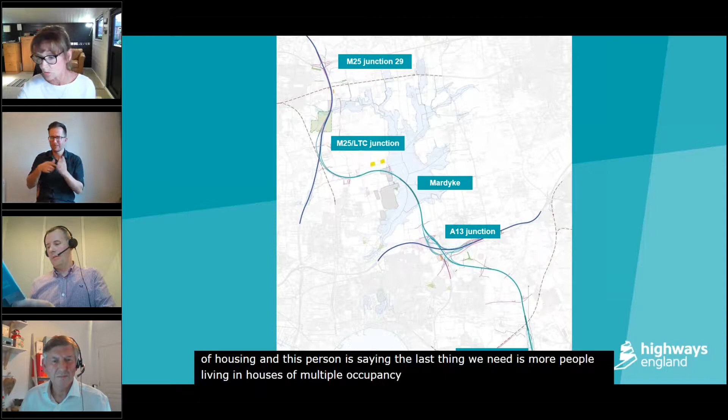So I think we've got one more question now, time for one more. Could you give me an indication on the map where the 1,000 plus workers on the LTC would be housed in temporary accommodation, as Thurrock has a major shortage of housing? And this person is saying the last thing we need is more people living in houses of multiple occupancy. I don't know which one of you wants to pick that up. Gary, Steve, either one of you, whichever you'd prefer.

Yeah, Gary, could you pick that up while I'm looking up the previous question? Yeah, I think where possible, recruitment from local communities reduces the need for extra housing. So we've carried out a study to look at local supply, and we'll work with the local authorities to fill those jobs. If any working accommodation is needed, it will be included in the Code of Construction Practice. So we will consult locally with the authorities in developing the Code of Construction Practice. So essentially, we'll be looking at that during the next stage of the scheme.

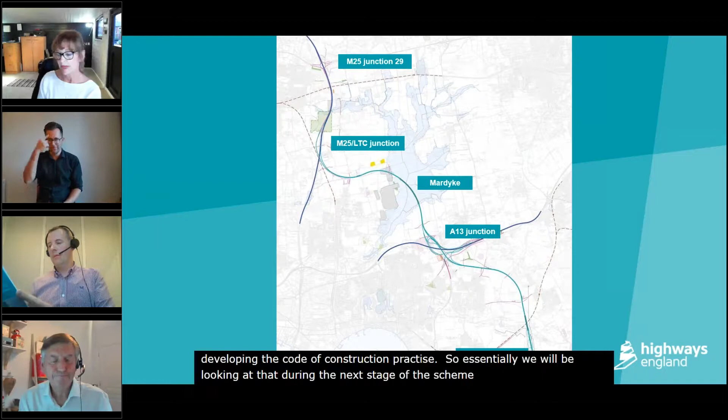And I think that's key to it. I think that any solutions that we try and find to make sure that the workforce who are either local or come from the wider region have somewhere to live, it will be worked out with the local authorities so that everybody's needs can be best met. Thank you for that, Gary. I think there's maybe a little bit of information come through for Steve to help him clarify on some of the development boundary question that you had earlier, Steve.

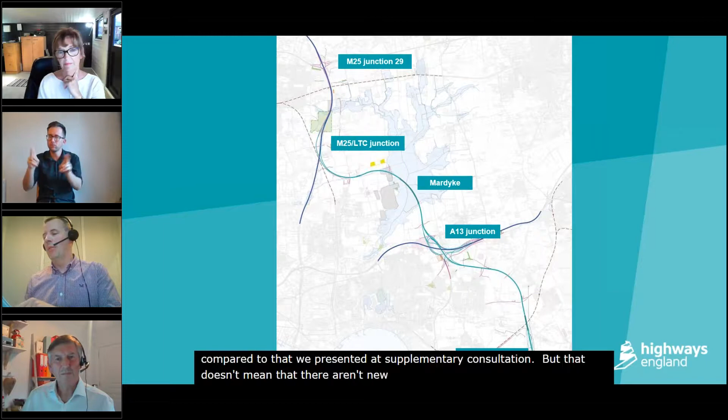I think if I can pick it up now, my reading of this, I think what we're trying to say is overall there's a reduction in the area of land that we now require compared to that we presented at supplementary consultation. But that doesn't mean that there aren't new areas that may be required on a permanent basis. So it could be that there's some areas that were previously outside of the development boundary that are now required. But paragraph 2 on page 86 that's referred to is basically stating that the overall land take for the scheme as a whole is showing a reduction of about 3 kilometres squared. Okay. I hope that answers the question. If it doesn't, I'm sorry, perhaps the person who asked it could feel free to email us or ask for a callback service. Great, okay.